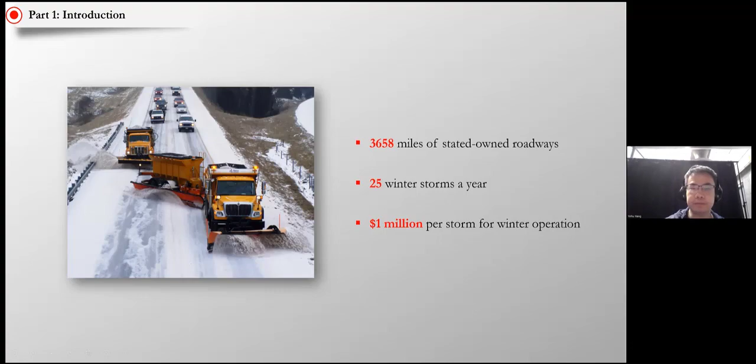In Utah, each year may have 25 winter storms, and each storm takes about $1 million for the winter operation. So it's really a big investment. Given the bad impact on travel safety and the investment in winter operations, if we can improve the snowplow route and the snowplow allocation, we would improve the efficiency of snow removal, maintain safe road conditions, and maybe reduce the budget for winter maintenance.

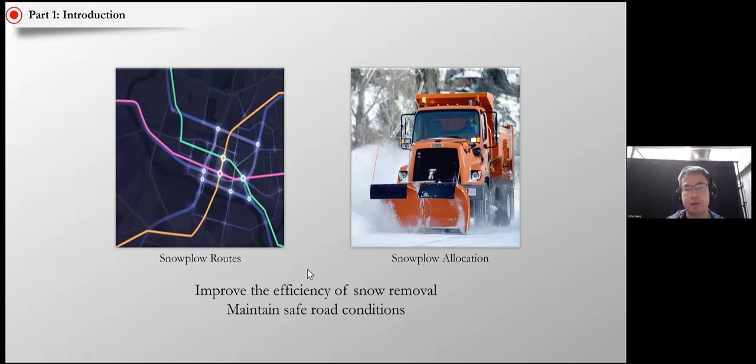So this is the background and the motivation. We wanted to optimize the snowplow route and also optimize the snowplow allocation. Next we go to the second part, snowplow route optimization. In this part, we studied the 12 regions within Northern Utah. As you can see in this figure, this includes 12 regions, and the different lines represent the roadways covered by each region.

Also, each region has a fleet of snowplowing trucks, which is shown in this figure. As you can see, there are 3 plow types in total used in each region. For a single wing plow, each pass can clean 1 lane. The tow plow can clean 2 lanes each pass. For the double wing, the capacity is between the single wing and tow plow, maybe 1.5 lanes. This is usually used for cleaning the highway lanes and the shoulder.

We can see for some regions there is only 1 type of plow, for example Ogden. And also for each region, we optimize the roads.

For example, we take region 8. We can see here the detailed network is chosen, and we also marked the lanes for each road segment.

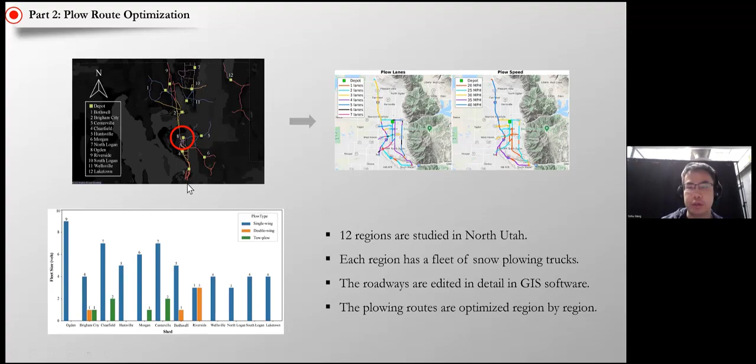The first task is to evaluate the efficiency of UDOT's current snowplow operations by mining the AVL data. This AVL data is vehicle location data showing how the snowplow trucks move to clean the lanes. Then we want to design a route that will be more efficient than UDOT's current routes.

In order to complete these 2 tasks, we need to implement 3 steps. The first one is AVL data processing, to mine and evaluate UDOT's current routes.

Then we need to do network editing, given the roadways, to edit the network and get information for each road segment to construct the graph. This is a very key input for the routing algorithm.

Then we run our algorithm to optimize the route and evaluate these 2 steps: the first being UDOT's current routes, and the second our proposed route.

Next I'll talk about these 3 steps in detail. This is the roadways provided by UDOT, and we can see the roadways we need to clean.

This region is Laketown. This figure shows a lot of green icons.

Each point represents the location of the snowplow truck at a certain time. Through visualization of these points from earlier to later times, we know how these trucks move around to clean the lanes.

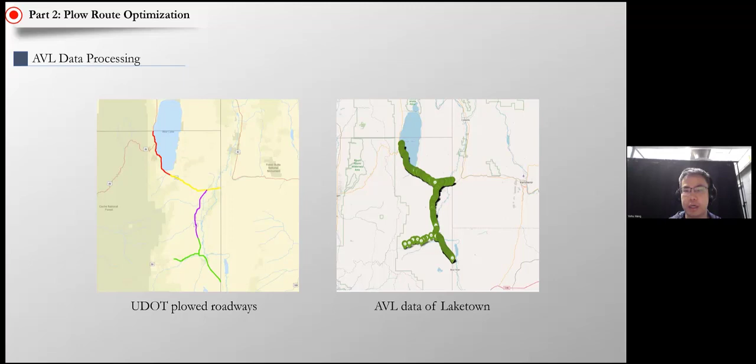By observing these roadways, we edit the network in ArcGIS Pro. We insert a node at the intersection at each junction, then connect using a line to connect to the nodes, and then we can get the road segment information.

This is shown in this table, which includes five columns: the head node index, tail node index, the number of lanes for each arc, the length of this arc, and the traveling times.

For example, let's look at the first row. It means the road segment from north to south direction, and this arc has 1 lane in total, the length of the arc is about 4.12 miles, and the traverse time is about 8 minutes. So on and so forth.

After obtaining this road segment information, we can construct a travel cost, which is used in the following step.

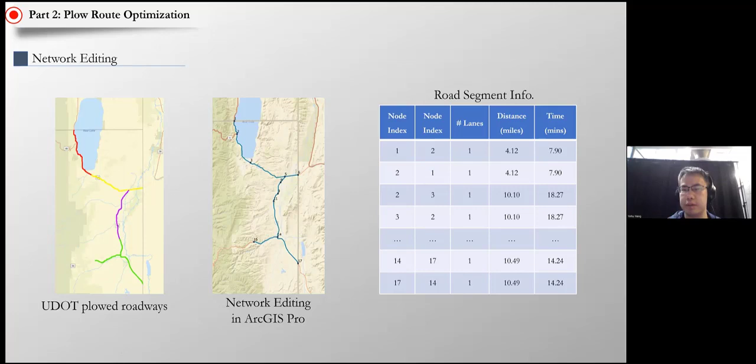With this information, we want to design a route to clean all the lanes in the network. To simplify this figure, we use a black node to represent the intersection at the upstream, another black node for the intersection at the downstream, and 4 arrows to represent the 4 lanes we need to clean. We know that the demand is located at the arc.

So this could be formulated as the arc routing problem. But during the past decades, much research work has focused on node routing problems, so many advanced algorithms can be used directly.

In this project, we also transform the arc routing problem into a node routing problem. For example, we insert a green node between this link to represent the demand node. Then if we can design a route with minimum cost to visit all these nodes, we can make sure that all the lanes are visited and cleaned.

We run the algorithm provided in the MATLAB toolbox, and with their given objectives, we can get an optimized route. Applying these 3 steps on each region, we can optimize the route.

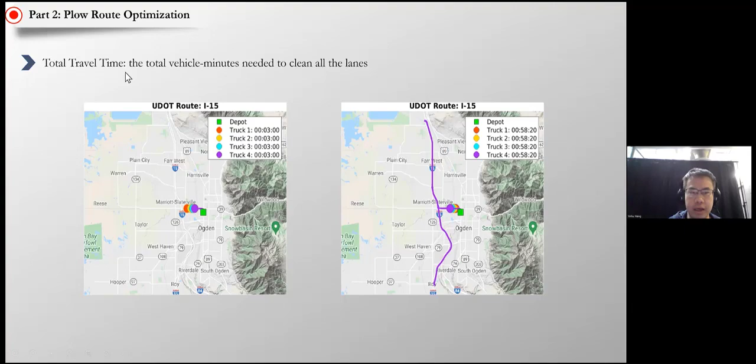The next metric is turnaround time, meaning the duration of the longest route. Taking these same figures, starting from the depot and after a duration coming back, we can see truck 1 and truck 2 spend the longest time to finish their trip, about 2 hours. This duration is the longest among these 4 trips, so the turnaround time for this instance is about 2 hours.

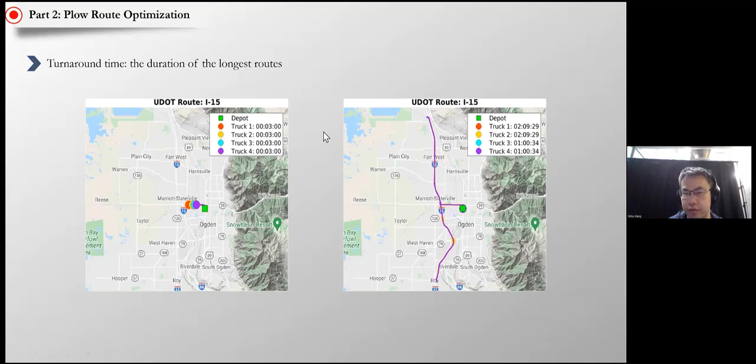The last metric we use is deadhead miles, which tells us the utilization rate. This means the total distance the trucks travel without service. For example, consider a road segment of length 1 mile with 3 lanes to be cleaned. The truck takes 3 passes to clean all the lanes, then approaches another lane and has to traverse this lane without service—that 1 mile counts as deadhead miles. If we sum up all such cases, we get the deadhead miles for the whole network.

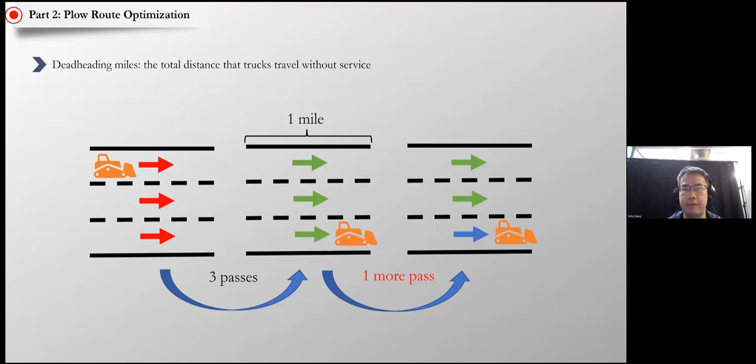Based on this data, we can see that our proposed route is much more efficient than the routes currently implemented by UDOT. I think this can save a lot of working time and also investment for winter operations. So that's what I wanted to introduce for the snowplow route optimization.

Next, we want to show an animation of the two sets of routes for Wellsville. At the very beginning, a total of 4 trucks are allocated to Wellsville, starting from the depot into different road segments. We can observe that trucks 2 and 3 have the same route, but the difference is in trucks 1 and 4.

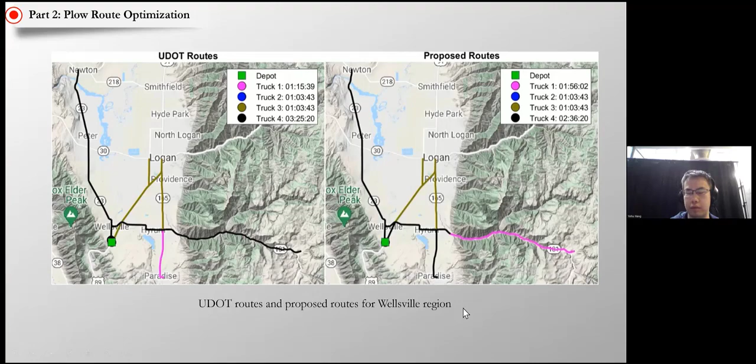I want to talk about snowplow allocation. There's a chance of truck failure, given a fixed fleet size. If we don't consider the truck failure, it may cause an increase in turnaround times. This has a bad impact on the service level. So in this part, we build up a snowplow allocation model.

We want to minimize the maximum turnaround times that can be sustained with a predefined probability. The objective of this model is to minimize T, and the constraint is that all of the trucks we can use is equal to K, and also we make sure the maximum turnaround times across all regions: the probability that the maximum turnaround time across all regions is less than T should be greater than 1 minus alpha. This alpha is our predefined parameter, and 1 minus alpha is the predefined probability.

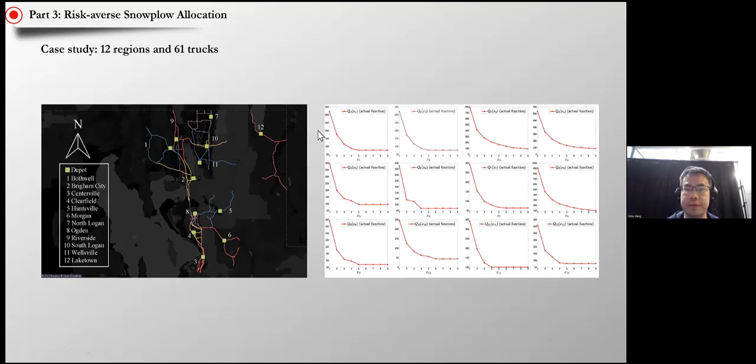Here, we also build up a transportation problem to determine the snowplow reposition strategy, showing how we can transform the current allocation to the resulting allocation with minimal cost. For example, in this instance, region 1 should provide 1 truck to region 7, and region 2 will receive 1 truck from region 8, region 5, and region 6 respectively. Besides, region 6 also needs to provide 1 truck to region 3.

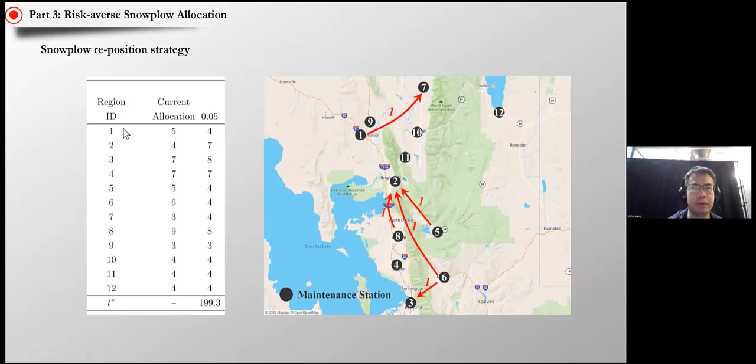So this is what I wanted to talk about regarding risk-averse snowplow allocation. I think this model is very useful to transportation agencies, especially the winter maintenance team. For example, this model can determine how the allocation of trucks can guarantee a certain service level can be sustained.

Now we get to the final part, the conclusion. In this presentation, I shared two things. The first is snowplow route optimization. We optimized snowplow routes for 12 regions in North Utah, and for three metrics, all of them were reduced significantly. This will help remarkably improve the efficiency of snow removal operations, and I think also recover road conditions efficiently.

The second thing I talked about is risk-averse snowplow allocation. In this part, we formulated a risk-averse snowplow allocation model and proposed an iterative procedure to solve the model, then applied the model and method to 12 regions in North Utah. Using this model, we can input any arbitrary value of alpha to get the optimal solution, guaranteeing the turnaround times can be sustained with a predefined probability.

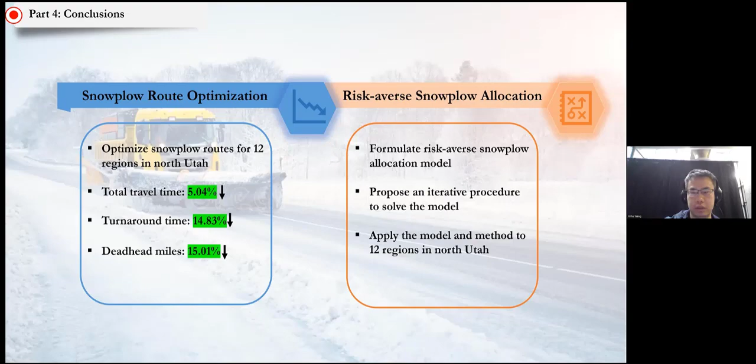So let me just jump in really quickly. Yinfu, I've shared the link for the 12 region animation in the chat box. So can you please perhaps open it so that the audience can see what all those routes look like? I shared it here, and so for the others also, if you look at the animation that Yinfu will share, you will see in the description of it the links to animation showing routes for individual regions. So we did a comparison at the region level, so you can see on the left-hand side the original routes, and the right-hand side the proposed routes.

Okay. Nicola, you can share your screen if you would like. I gave you rights to do that. Oh, Yinfu, you've got it? Okay, he's got it. Yeah. Okay.

So basically, yeah, I can talk a little as well. So when it comes to representation of routes, we found it actually most effective to discuss them with the shed foreman using these animations, because routes clearly overlap. So when you try to design a static visual of these routes, you can't really understand much out of it. So this is why we were going for these dynamic visualizations. Yinfu, can you also show some of the animations from the description, show where they are, so that people can take a closer look at them afterwards?

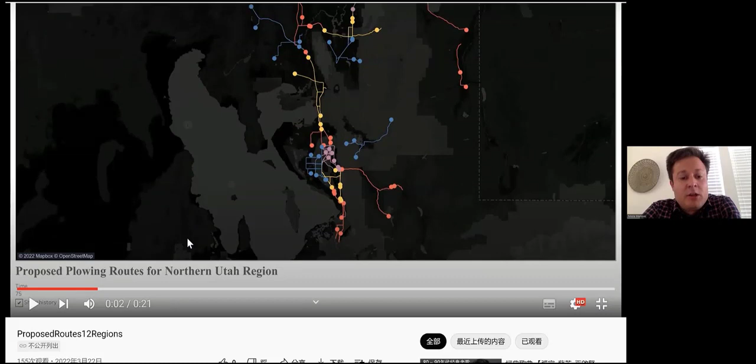So this is the proposed route, right? Only proposed route for each region. And I can see the description here. So here you can see links for each of the 12 regions. Some of them also include different scenarios. So for some of the regions, Yinfu looked at the situation, well, what happens when we impose echelons on some of the major routes? What if we don't impose the echelons? What if we replace one single wing truck with a double wing truck? How does that affect the operations? Which is why for some of these places, you have basically multiple animations.

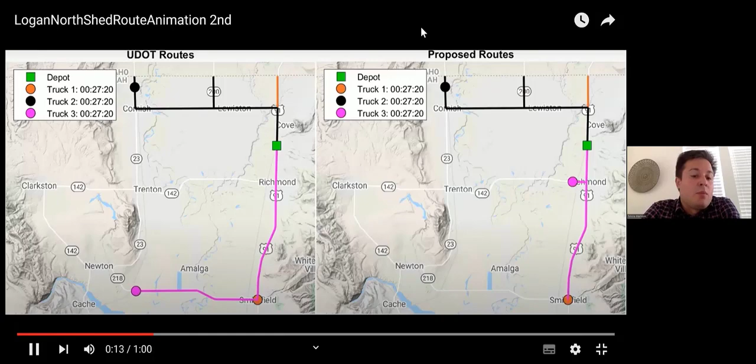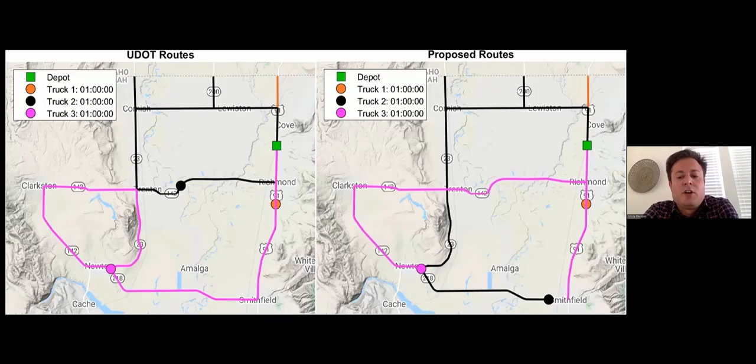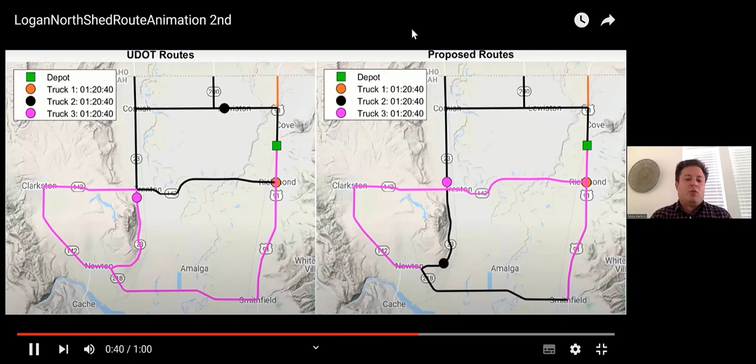Can you maybe open up North Logan, and then we'll of course invite the audience to explore these after the webinar. So yeah, on the left-hand side, you have the original routes. On the right-hand side are the proposed routes. So this is how we're able to compare things apples to apples. The shed foreman loved this approach, and then you'll see basically on the right-hand side, our routes will actually return to the depot, I think 15% sooner than the ones on the left-hand side. In other words, we're able to reduce the turnaround time by about 15% by balancing the workload among these different routes. So you'll see that the right-hand side will finish quicker than the left-hand side.

Yeah. Okay, so this is our work. Yeah. I think you've paused it. Go ahead. Go back. Yeah, this is working. Yep.